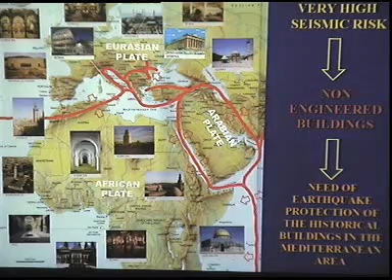We have to consider that this area is characterized by a very high seismic risk due to the conflict of 3 plates: Eurasian, Arabian, and African. And you have to consider that in this area there are so many buildings belonging to the cultural heritage, with different features and different styles, and at least 2 or 3 or more religions present.

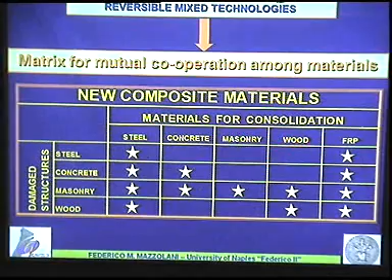The common point of this project and the key word is reversible. Reversibility is a property very important in this kind of intervention. Reversible mixed technologies come from a matrix of mutual cooperation among materials. Consider the possibility of a new material for consolidation which can help the old, damaged material. In this way we create a kind of new composite material.

The PROHITECH activity developed from 2004 up to 2008. Every year, the first output was devoted to the state-of-the-art dealing with intervention strategies. The second deliverable was devoted to identification of innovative materials and techniques, in order to identify among them the so-called reversible mixed technologies. The third part is the most important one, devoted to experimental and numerical activity in order to set up calculation models. The last part gives validation criteria and design guidelines applied to many study cases.

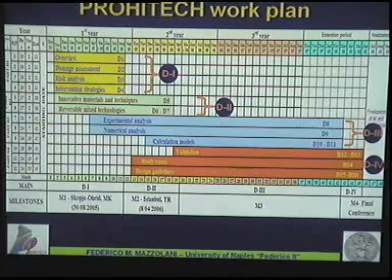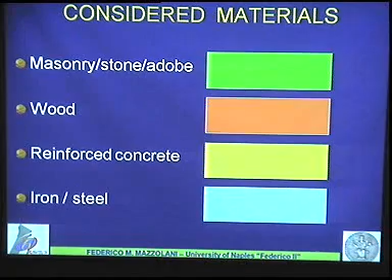I would like to mention some important issues of the experimental activity. Look at the materials, look at the color. We consider masonry in the form of stone or adobe, wood, reinforced concrete, and iron or steel. We tested different kinds of levels: full scale and large scale models, substructures, and devices.

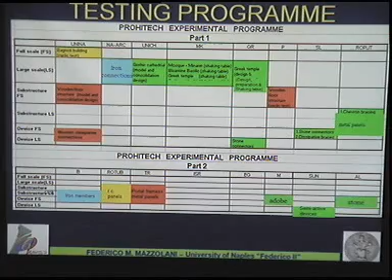If you look at the color, green is for masonry, orange for wood, yellow for reinforced concrete, and blue for iron. You can see how the tests have been distributed among the different partners. Only Israel and Egypt didn't carry out any experimental activity.

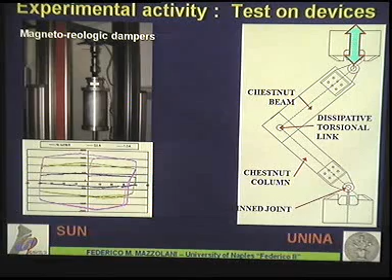We start from tests on devices and substructures. For instance, we tested magnetorheologic dampers at the Second University of Naples, and special dissipative torsional links for timber structures. We tested this specimen in our department at the University of Naples. We also tested dissipative panels, which are used as a damping element in structural applications.

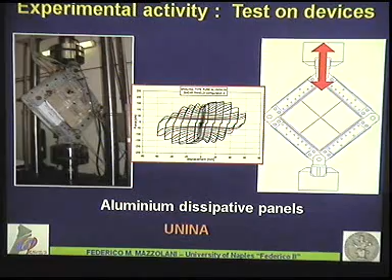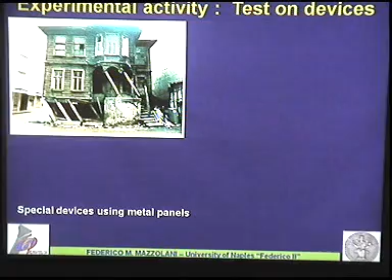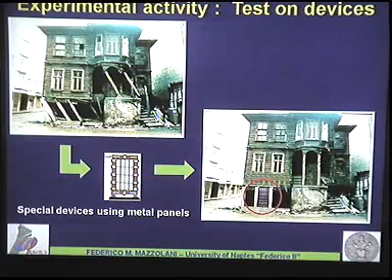This timber building was damaged during the earthquake in Turkey in 1999. We think that if a special metal panel had been used as a device, this building would not have collapsed. At Boğaziçi University in Istanbul, we tested timber frames reinforced by metal panels and submitted to horizontal forces.

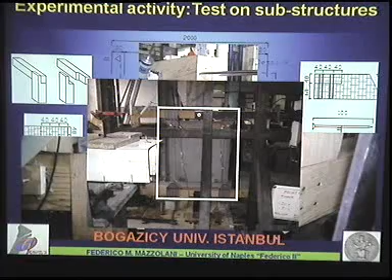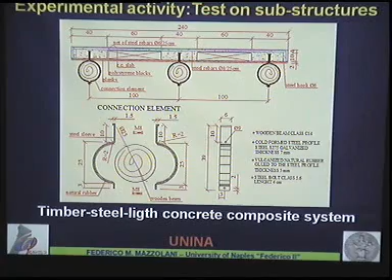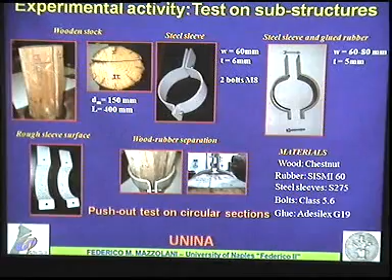In Naples, we proposed a new composite system made of timber, steel, and light concrete, using connection elements like steel sleeves surrounding the old wooden beams. We tested different types of connectors, using different materials in the interface between the sleeve and the timber, and tested the full-scale element in our laboratory.

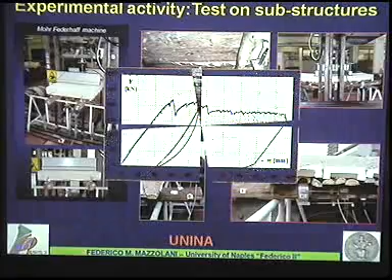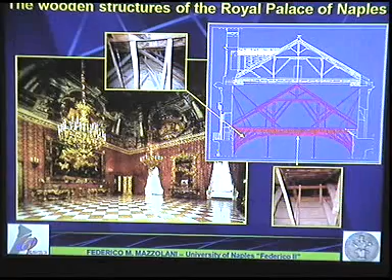We applied this new system to the wooden structures of the Royal Palace in Naples, in a very important hall where the structure is sustaining the frescoes on top of the room. We applied this kind of system in order to connect the horizontal floor and the vault.

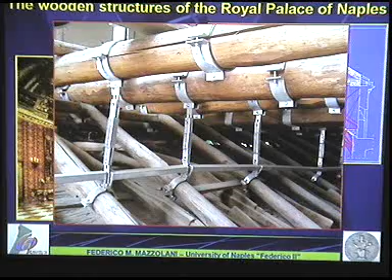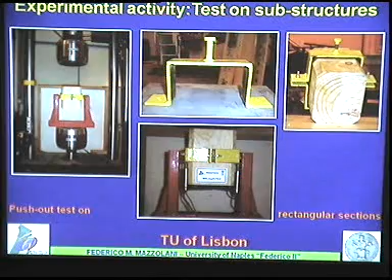In the case of timber beams with rectangular cross-section, we use a different type of connector. We tested this type of composite system at the University of Lisbon.

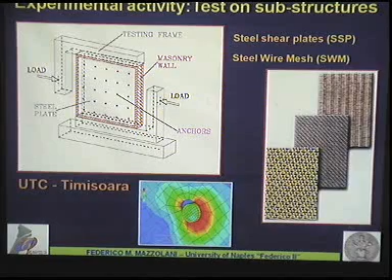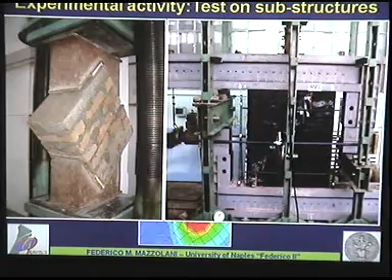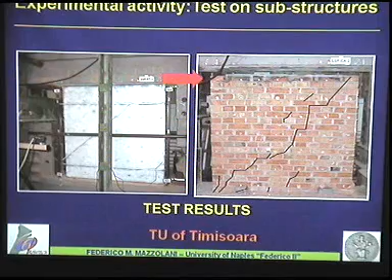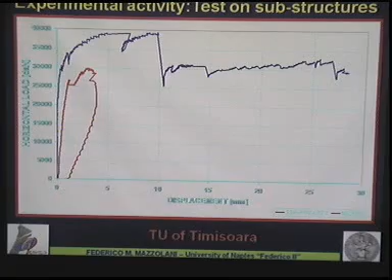In Timișoara, Romania, we tested the possibility of steel shear plates connected to masonry. We made a diagonal test as well as panels submitted to horizontal forces. On one side there is the metal panel, and on the other we apply the horizontal load and obtain a given result. In general, we increase both the strength of the panel and, in particular, its ductility.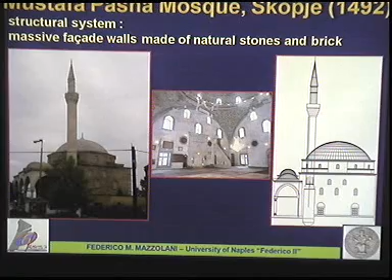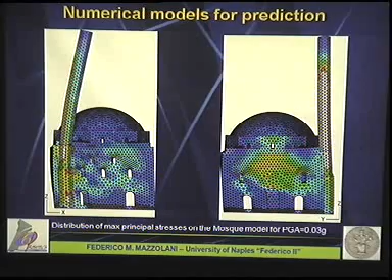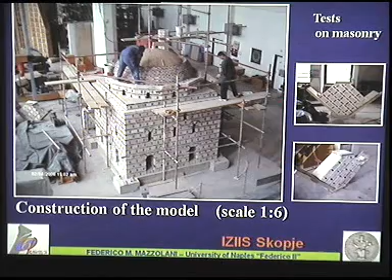Very important is the experimental and numerical activity on large-scale structures. This is the Mustafa Pasha Mosque in Skopje, built in 1492. We decided to make a model of this structure, and numerical models were used to predict its behavior. We built the model at scale 1 to 6 using the same stone as the original mosque, and the final model is very well done, including the minaret.

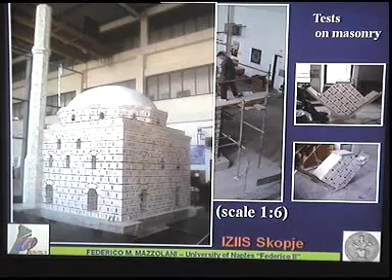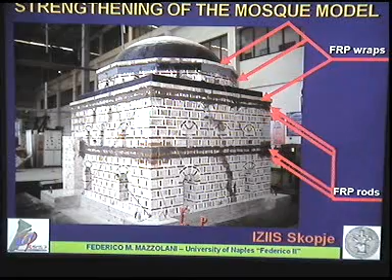We tested this model, damaged it, and afterward repaired it by means of FRP wraps on the top part and FRP rods in the mortar joints, using a system we had already applied in another building.

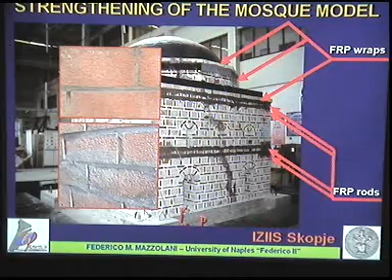And now there is a movie. After repairing, the model was damaged again and tested until collapse. You can see the weakest part is the connection between the upper dome and the bottom walls.

It was very satisfactory for us that the cultural heritage authorities in Macedonia used the same system we had proposed for reinforcing the real mosque.

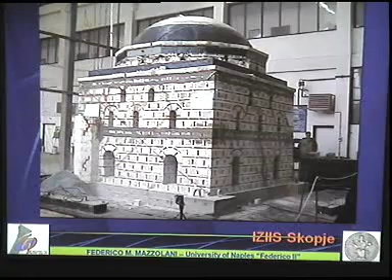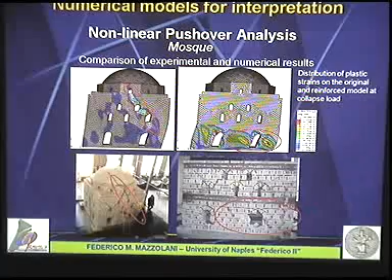Nonlinear models, numerical models, have also been used for interpreting the results of this test. The second large-scale model is the Gothic cathedral of Fossanova. It's in Italy, south of Rome. It's a typical Italian Gothic. It's not a Gothic like in Spain. It's not so splendid, it's a little more

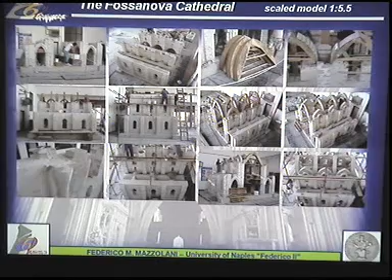calm. And we built the model using, in this case, an artificial stone, considering the scale, also in strength. The model was in scale 1 to 5.5 in order to exploit all the dimensions of the shaking table. And it was designed piece by piece and built in a very, very careful way. Look, this fantastic model seemed to be really a Gothic cathedral.

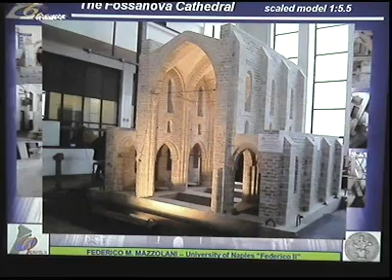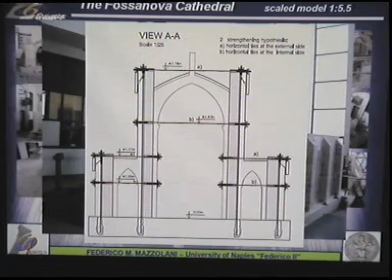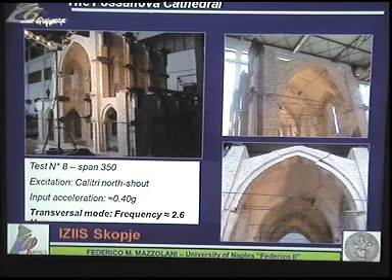It was tested and repaired using, if you want, a traditional system, because you use ties, but not only ties at the bottom of the arches, but also on the top of the arches. And we also put vertical ties in the columns. This was very important, because with this system we increased the capacity of the structure 3 times. And we obtained the final acceleration, 0.40 g, which was perfectly predicted by the numerical model.

Look at the last phase of the shaking table test, which was done at the Skopje IZIIS Institute. We applied the Calitri earthquake registration, which started with a first quake, and then it seemed that everything was finished, but after this, stronger quakes arrive and produce the major damage. You see.

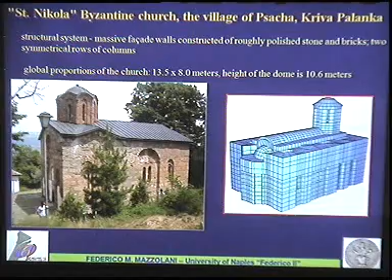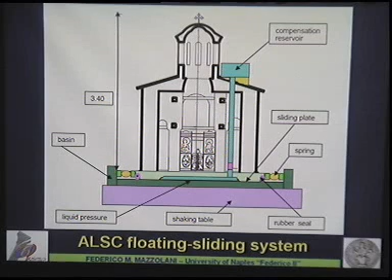The third model was a Byzantine Basilica, St. Nicola. In this case, we applied a very special type of seismic protection. You know, base isolation is very common using rubber bearings. In this case, we isolated the structure by means of water in pressure, the water below the model. You see the model is like in a swimming pool, and a small pressure isolates the building from the quakes. In this condition, using the maximum power of the shaking table, we were not able to produce any kind of damage to the structure.

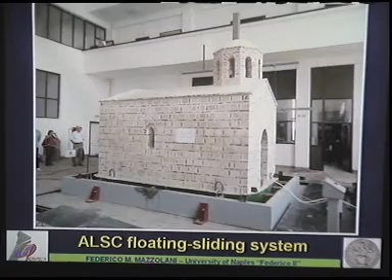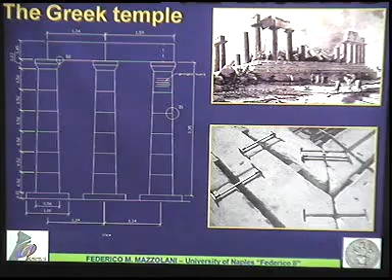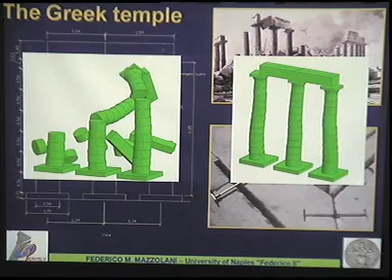And of course, we also had Greek partners, and the Greek temples were another subject for a large-scale model. You know the importance of the connectors in the architraves on the top of the columns, and it's easy to demonstrate that the presence of these connectors can avoid the collapse of the temple. But you cannot use iron or steel because of corrosion. Corrosion can produce more damage than the earthquake in some cases. So we use special devices for connection, made of stainless steel or titanium.

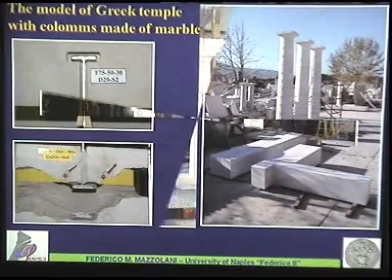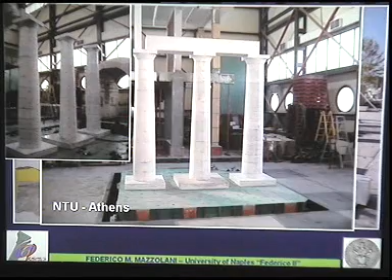And we built 3 columns using the same marble as in the Parthenon, coming from the same mine, in scale 1 to 3. In the Parthenon they are 10 meters; we used 3.30 meters. And we tested these columns on the shaking table of the University of Athens considering 3 types of configuration: isolated columns, columns connected with architraves in line, or in a corner configuration. And we tested with and without connectors on the top of the architrave.

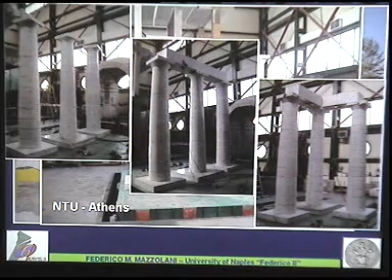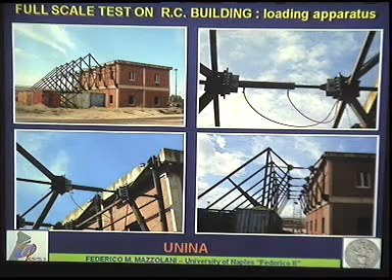We also tested a full-scale structure. I received this reinforced concrete building as a gift, in a dismantled area of the old steel mill near Naples. We consider reinforced concrete also a historical material, because the whole 20th century is characterized by reinforced concrete buildings, and many architects produced very important works in this material. We built a special reaction structure in steel, and we applied a cyclical load totaling about 300 tons. We produced damage corresponding to an earthquake with a return period of more than 3,000 years.

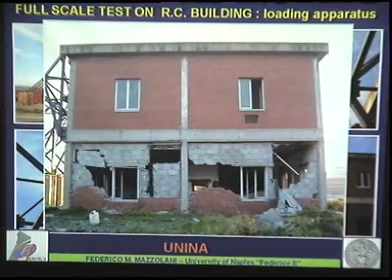But then we decided to repair, and we repaired by means of these special devices, a kind of bracing called BRB, buckling restrained braces. It means that this device cannot buckle. It works in the same way in tension and in compression. It means that one diagonal per mesh is enough, and we accommodate this diagonal inside the gap of the 2 masonry panels of the external claddings. And we really obtained a very satisfactory result using this system.

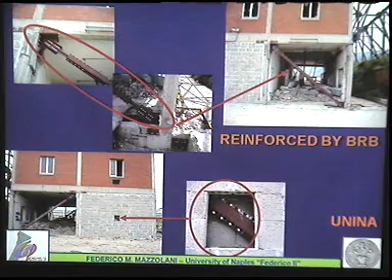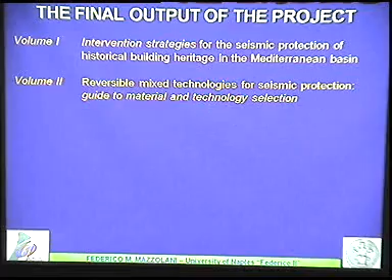The final output of this project is 6 volumes. The first is devoted to the intervention strategies used in the seismic areas of the Mediterranean basin. Volume 2 is devoted to reversible mixed technologies, identified as an innovative system for seismic protection. In Volume 3, we have all the experimental activity; imagine that this volume alone is 900 pages, and in total the 6 volumes are 4,000 pages. Volume 4 is devoted to the numerical activity and calculation models, number 5 provides the guidelines for the protection of historical buildings, and number 6 is a collection of case studies.